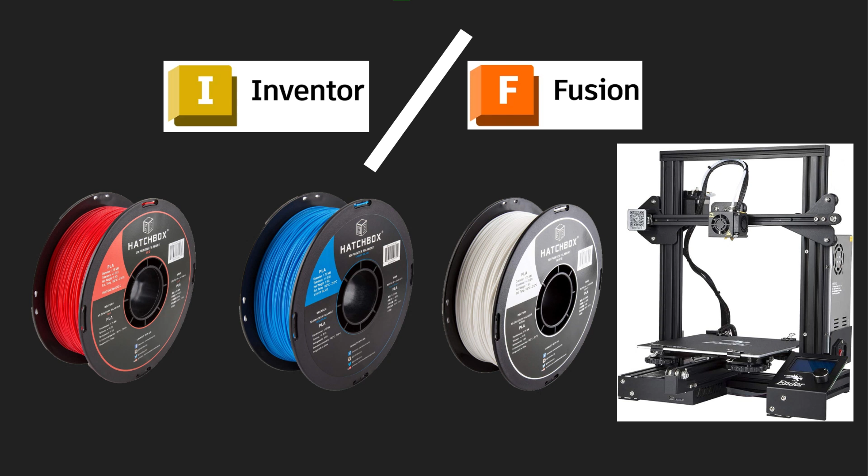Hello everyone, so today I'm going to be telling you how to make your own custom plates. What you're going to need is a 3D printer, a copy of Inventor, I'm not sure if Fusion works as well, and you're going to need 3 colors of filament. You're going to need a red filament, a blue filament, and a white filament. And that's not just extra, that is what you need per Vex rules.

The first step is going to be visiting the link in the description and downloading this IPT file. I already have it downloaded. Then you're gonna open Inventor. Now you're gonna go to Open, go to Plate Template for Printing, wherever you just downloaded it to. You might have to navigate your file explorer a little bit to get to it. Okay, so the first step is gonna be changing the team number.

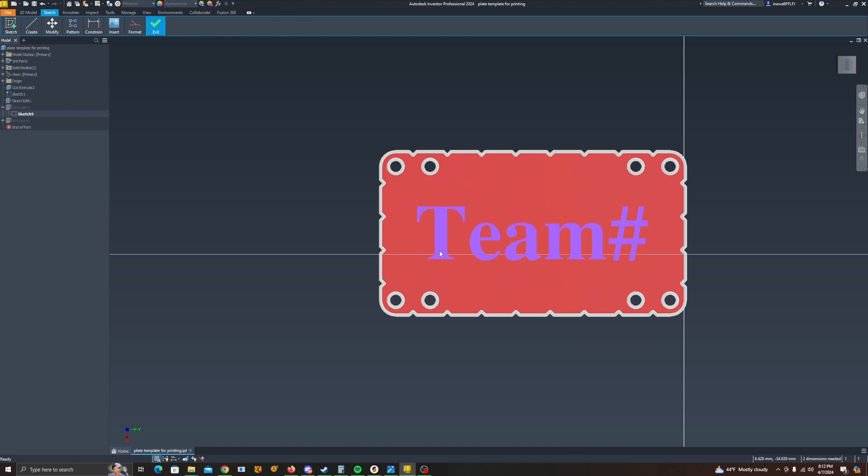So you're gonna go to Extrusion 3, Sketch 9. You're gonna double click on Sketch 9. That will open it up. Now you're gonna go to Team. You're gonna double click on that, and that's gonna bring you this. Now simply... I don't know why it's doing that. Just make sure it stays the same size. You might have to do that. I'm team 242S. If you want a space, you can put a space there. If you don't, you don't.

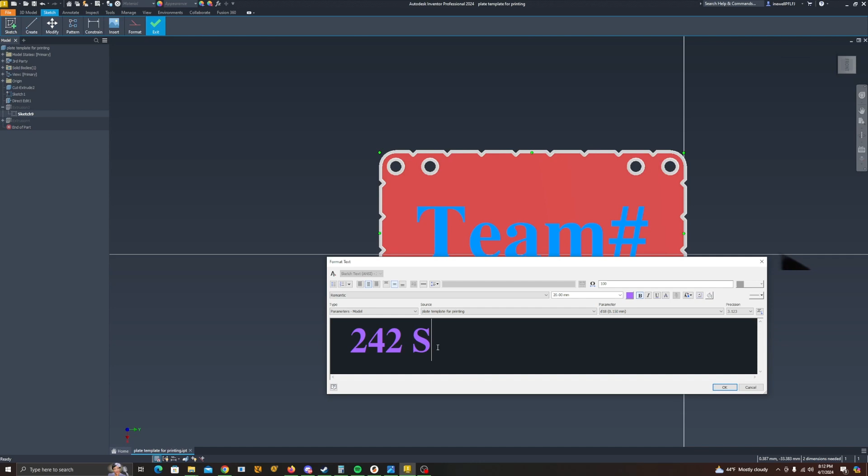Then I personally love, what do I love? I love me some Comic Sans, don't I? Comic Sans, wonderful. Who doesn't love Comic Sans?

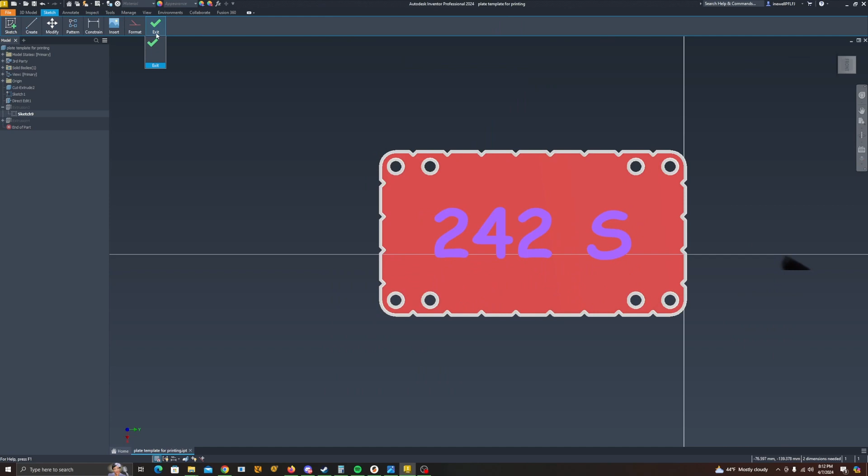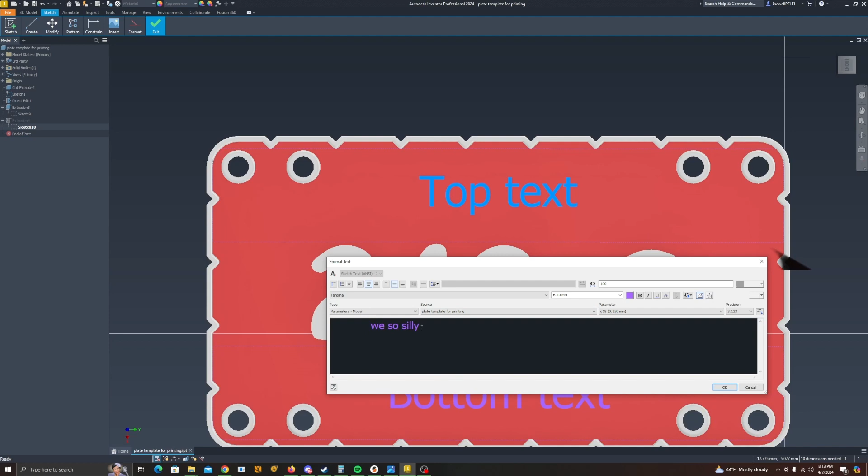Now, mark exit. It's gonna do that. And okay, there we go. Now, next part is gonna be editing top and bottom text. So this is the same process. We so silly. All lowercase is more aligned. Find Comic Sans again, since we do love some Comic Sans.

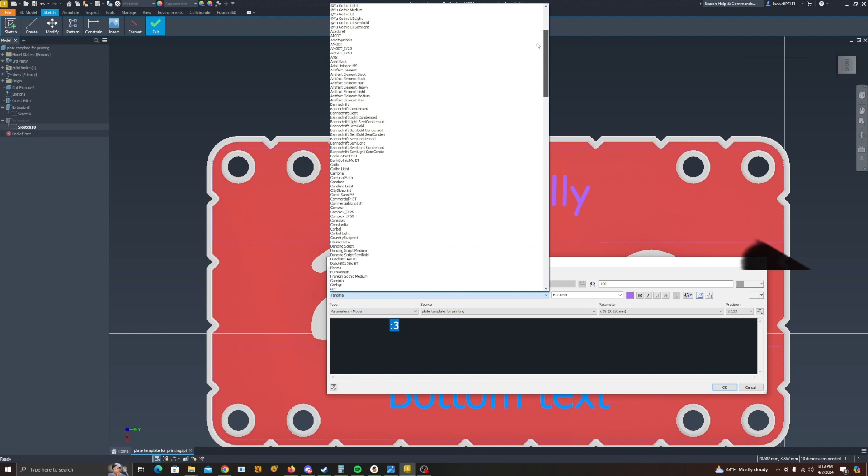Colon 3. Who doesn't love colon 3? Wish there was a system that would keep your font selected, but no. There we go. And now we're going to do the same thing. Exit. Wow, we so silly. Colon 3.

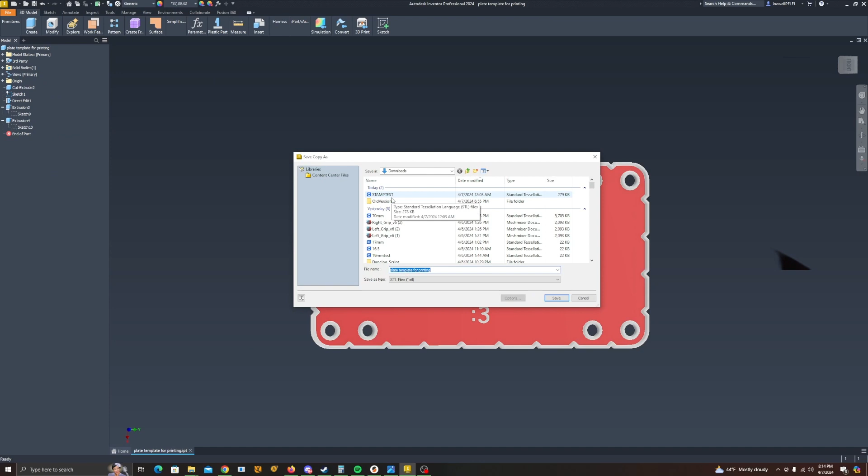Okay. So now that we have our plate done, now we're going to go to our 3D printing software. Oh, sorry. First, we're going to have to go to File. We're going to have to go to Print. We're going to have to send to 3D print service. That looks alright. Now, just call it whatever you want. Alright. The next step is going to be printing it.

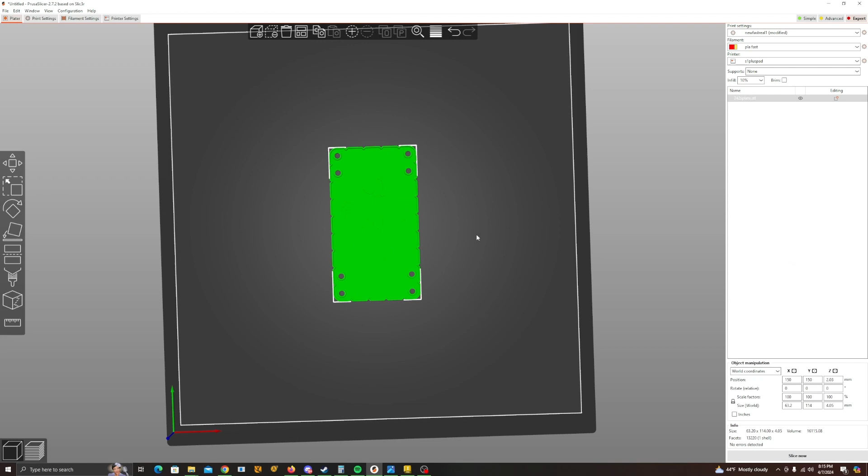So, I'm going to be using Prusa as it's what I'm most comfortable with, and I'm not sure how to do layer transitions in anything else, but I'm sure there's a way. So, opening up our file. Okay, now that we have it in, we're going to select whatever settings you like. We're just going to slice it. And now, the important part.

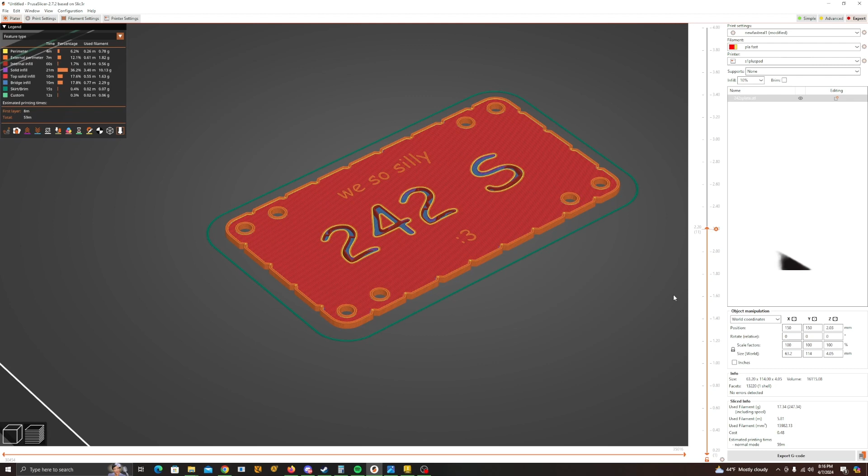So, you can kind of just move this down until you see, okay, so that looks like the final top layer to me. So, select the one after the final top layer, so when you can first start seeing the text on it, and then go click on that plus right there, and there you go. That is going to add a filament pause. You can change the filament and then resume printing. And then you are going to have to click slice again, and then export G-code.

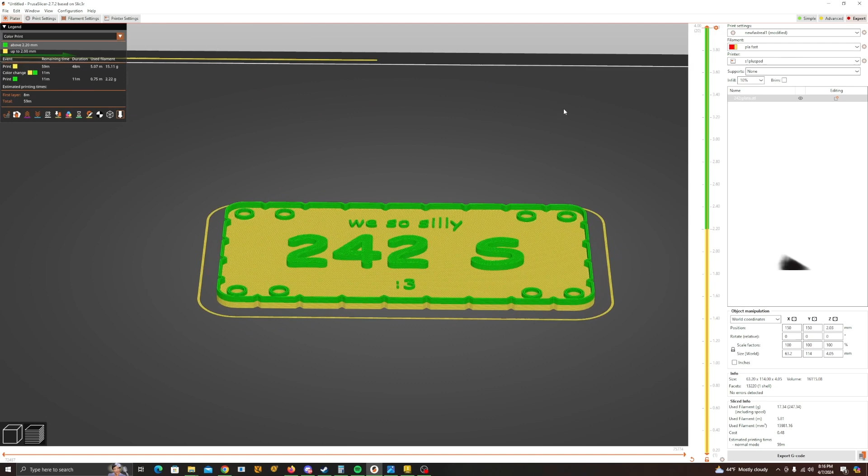So basically all you have to do now is go load your printer with, if you're printing the blue plates, the blue filament, and just print the file. It's going to pause once it gets to this layer, right? I'm not sure exactly how your printers pause, but when mine does, it goes to the corner, and it stops, and it has dialogue on the screen for me to continue it.

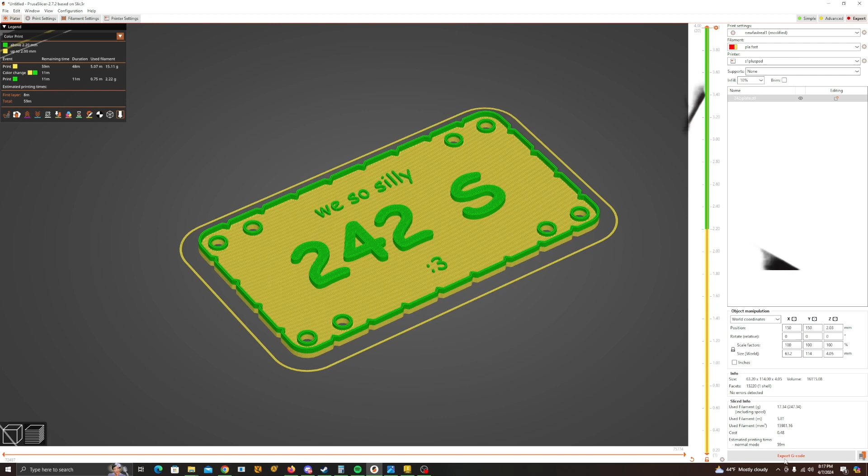So then, you just simply switch out your filament to the white filament, and then it will print everything else. So all this will be in white. Everything you see in green will be in white, everything you see in yellow will be either red or blue. And yep, just export your G-code, send it to wherever you want. That's easy enough.